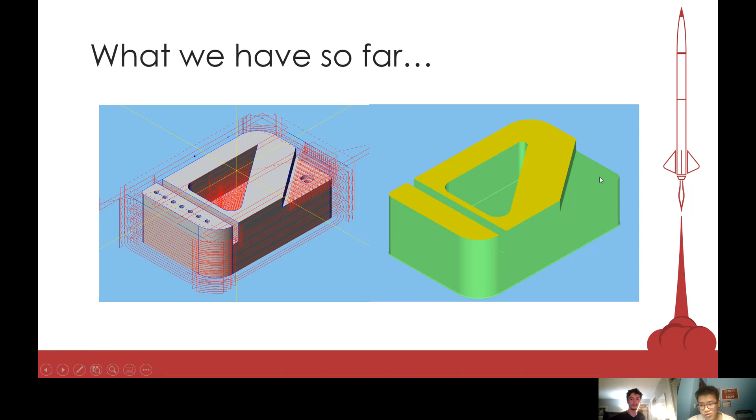Okay, so this is what we have so far. On the left side is all the tool paths, and on the right side is what the part is going to look like. But we're not finished. If you remembered, there are holes over here, and a counterbore hole over here. So we have to make those.

Whenever we're machining a counterbore hole, we have to follow this procedure: creating the bore using an end mill, and then using a chamfer drill, also known as a spot drill or center drill, to create a spot, and then using a drill to create the rest of the hole. So we'll start with that.

Let me go to here. Yeah, so this is the counterbore hole. We're going to try to machine that first. We know that the counterbore hole is 0.5625 inches in diameter, and it's 0.165 inches deep.

To make this, we're going to need an end mill that has a diameter less than 0.5625. We could use a half-inch end mill, but I think we should use a 3/8 end mill, because a half-inch end mill has a very similar diameter to 0.5625. That would mean the end mill is pretty much going almost straight down, which is not what we want. We want it to do multiple radial passes, and we can do that using a 3/8 inch end mill.

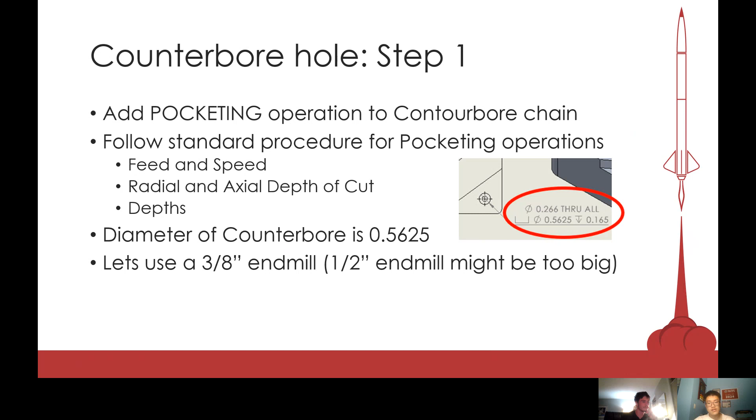Yeah, so that's why we're going to do that. We're going to add a pocketing operation to the counterbore.

If we want to add an operation to a chain, you click on the chain first. The first chain on top is called counterbore, so we're going to click on that. As you can see, the counterbore chain has now turned gray, so that's how you know you've selected the right chain.

Then we're going to go to Solid Mill Traditional - Solid Mill Production on the toolbar and click on that. The second option is pocketing. It shows facing, pocketing, contouring - this third one's contouring - then something called rest machining, which I'm not too sure what that is, and then drilling, which is what we're going to use for our holes.

But first we have to create our bore using the pocketing operation, so click on that, and you'll get the options on the left side. In our general tab, we're just going to quickly change our tool and select a 3/8 inch end mill.

Okay, then we're going to go to strategy. We're going to leave it at concentric out. And then our total depth, incremental depth, and starting depth have already been automatically generated based off the geometry of the chain, so that's fine.

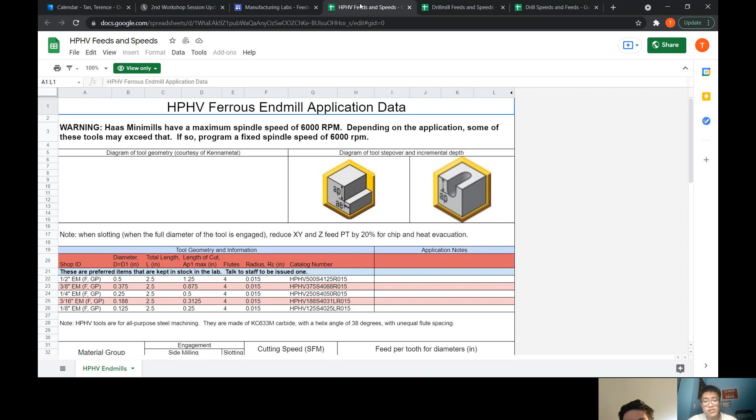Now we have to figure out what our X and Y feed rate are, and we can do that by going into Machining Data Handbook, clicking on non-ferrous end mills - that would be this one. Oh no, this is a ferrous end mill.

Okay, so we're using a 3/8 end mill. We'll set our XY feed right here at 0.003, and our Z feed at 0.0006 inches per tooth, which is labeled PT. So that's 0.003 for XY, and for the Z feed it's 0.0006 - that's going to be our X, Y, and Z feed rate.

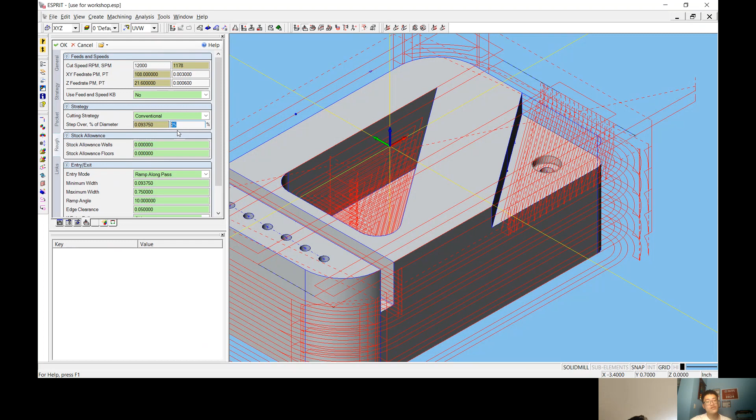And then like before, we're going to change our step over diameter to be 25%. Step over diameter is just our radial depth of cut, and 25% is what the documentation suggests, so we're going to leave it at that. Then you can just press OK.

If you zoom in, you'll see that there's some swirlies, which is pretty much exactly what we want. We're not going to simulate it yet because of how long it's going to take with all the other tool paths it's going to run for. So we're just going to go through everything else, and then simulate it, just for the purpose of saving time.

Yeah, that's what we had, which is good. And next, we're going to create our spots.

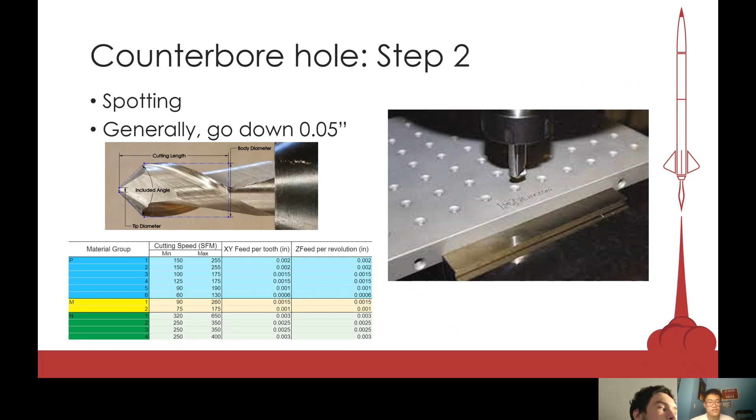To do that, we're going to click on the hole chain called 2 Hole. The chain called 2 Hole is this one, and 1 Hole is all of the other ones - all of these - because you can see that they turn gray. But we're going to stick with 2 Hole because we know that it highlights this one, which is what we want to use.

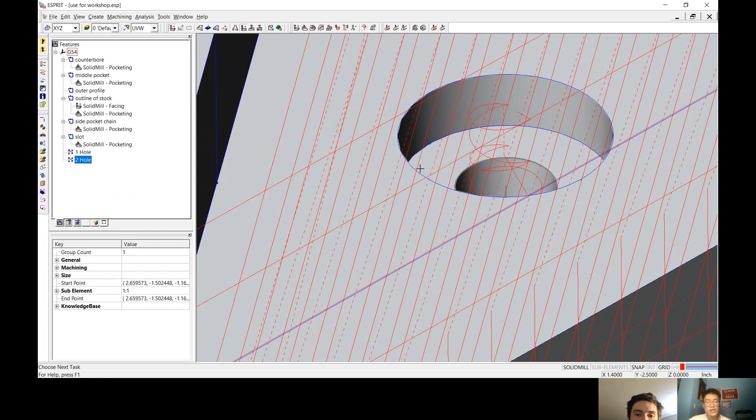Okay, so now we're going to click on drilling in the solid mill traditional - solid mill production toolbar. Go back to the general tab and then select the tool, and that's just going to be CM, short for chamfer mill, and it says 0.375 drill mill.

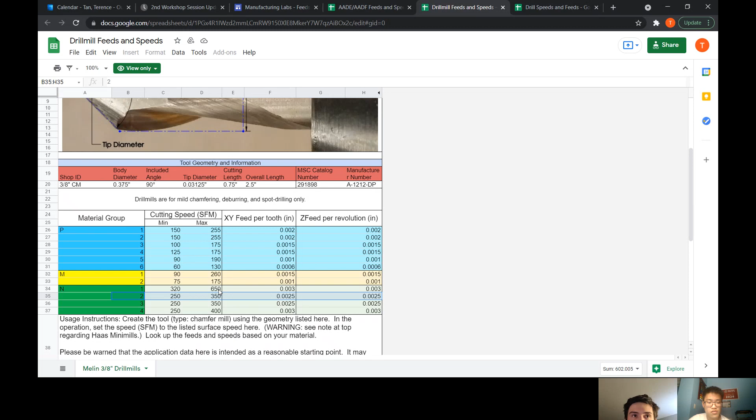Then we've got to figure out our feeds and speeds, and that's also going to be on MFE Labs. If you click on drill mill, right here, you'll get to this page, and that's what a drill mill looks like. We'll be assuming we're machining aluminum 6061 T6, so that would be an N2 material group, so we're just going to be looking at this row right here. Our cutting speed is fine - we can just use the max, so we'll set it to 350 surface feet per minute.

And then our Z feed rate is going to be 0.0025 according to the website.

And then we're going to go to drilling. There's something called cycle type, which isn't too important for spotting because it's automatically going to be set to drill. But we can have pecking operations, which I'm going to talk about later, and then tapping. So you want to make sure you use the right cycle type because that will obviously affect how it's going to machine it. For now, we're going to leave it as drill.

Our total depth is just going to be how deep we want our spot to be. General rule of thumb, you can just leave it as 0.05 inches - that's usually more than enough to lead in a drill. So we're going to set that to be 0.05, and that's our total depth. Then you can press OK.

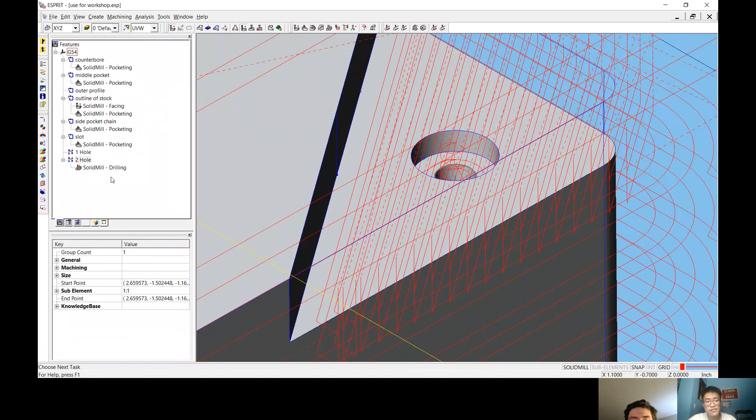Yeah, and that is - so we have first our pocketing operations here at our counterbore, then we can have this spotting operation.

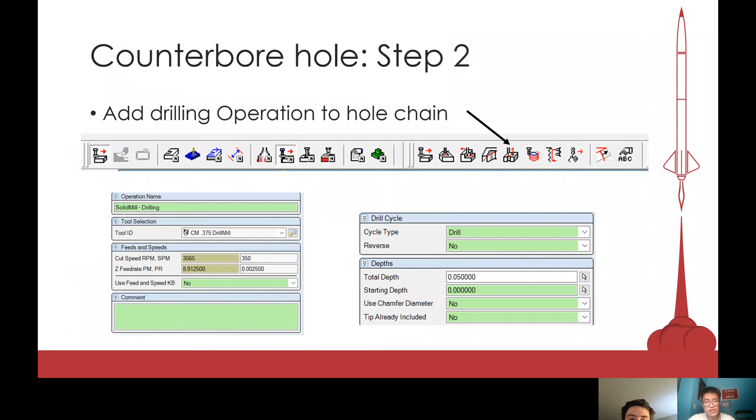Lastly, we're going to create our hole now. Let's see, we did that. Okay, yes. So we're going to use the same chain called 2 hole, and then we're going to click on drilling again. But instead of using a chamfer mill, we're going to use our H drill, because if you remember from our second session, we figured out that this hole has the diameter of an H drill.

An H drill has a diameter of 0.266, which is pretty close to a quarter-inch drill. So we're going to be using the same feeds and speeds for a quarter-inch drill for simplicity, and usually that's perfectly okay.

Then if you want to find your feeds and speeds, that would be right here under drill bits, and you're going to see this - our N2 class, highlighted right here, aluminum cast, less than 10% silicon. Our uncoated option, which is typically what we would be using, is 225 surface feet per minute. So we're going to set that right here - speed 225.

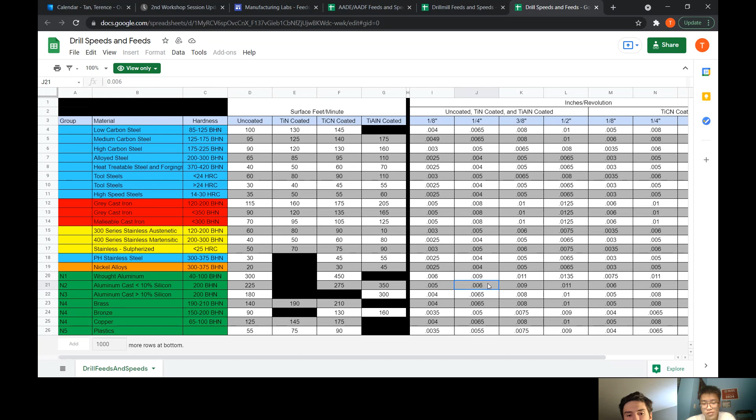Go more to the right, this has all of our feeds. So we're going to be using it uncoated like before. Our drill, H drill has a very similar diameter, a quarter inch. So we're going to be using those feeds. Quarter inch, and then we're going to go down to N2, and that's going to be 0.006. We set that as our feeds and speeds for H drill.

Okay, then we go to drill. When making a hole, you either want to use drill or peck. What drill does is it takes the drill and goes straight down in one pass, all the way down, and doesn't stop. What pecking does is multiple attempts of cutting into the metal. It goes down, goes back up, then cuts a little bit more, and comes back up. So it just incrementally cuts more and more.

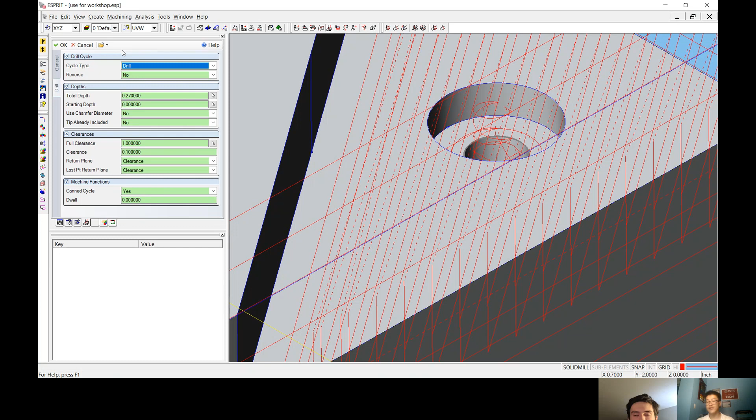When you have holes that are deeper, you're going to want to use peck because it helps with chip evacuation and minimizes the load that you apply on the end mill, especially because this hole is a through hole. It's quite deep, so you're going to want to use a pecking operation.

These peck increments will adjust how deep the drill will go for every peck. Generally you want to keep that equal to the diameter of the drill, and it automatically does that for you. So we're going to leave it like that.

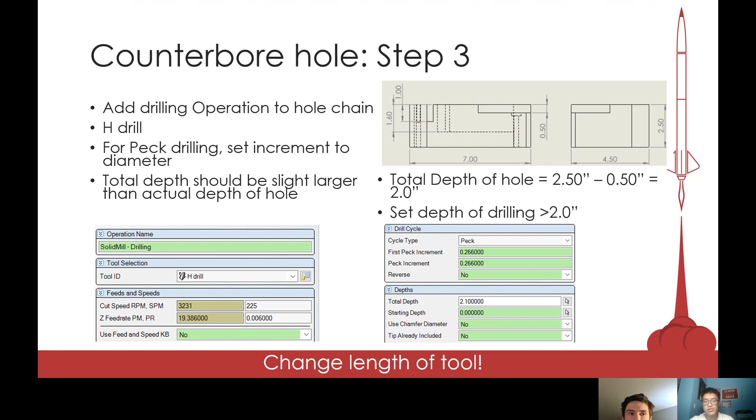Our total depth, we're going to have to figure out because this is wrong. If you look at this drawing, the entire part is 2.5 inches long, and this side pocket is half an inch deep. Then the depth of the hole is going to be 2 inches. We're actually not going to set our drilling depth to be 2 because of that chamfer that the drill has. So we want to go a little bit deeper to make sure we go all the way down. So we can do like 2.1 inches, and that should be okay.

Press OK. So yeah, you see here, that's how deep it's going to go, which is good. We want it to go past it.

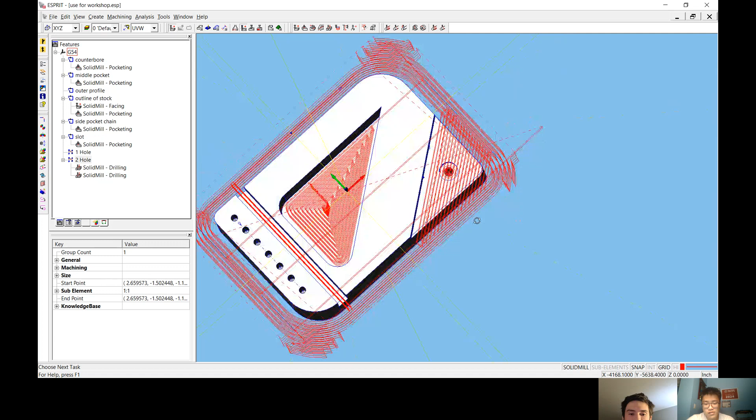So now we can simulate it. If you want to simulate, you want to click on the simulation button on the toolbar, which is the green one. Then you'll have your play, pause, and so on. Before we start simulating, I want to go ahead and click on simulation parameters and make sure your collision detection is on full.

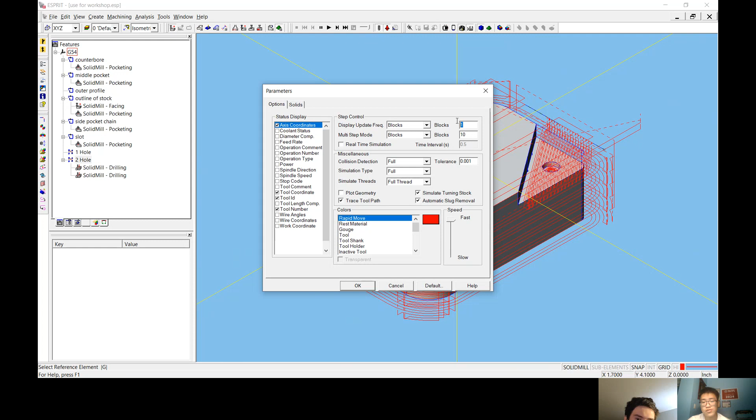Then we could speed up our simulations. You can increase these numbers. Let's add like a 0 here. Let's see how fast that goes. And you just press play.

I think that's faster than before. And here it comes. See? That's good, it went all the way through. Perfect.

Keelan, is this what you have so far?

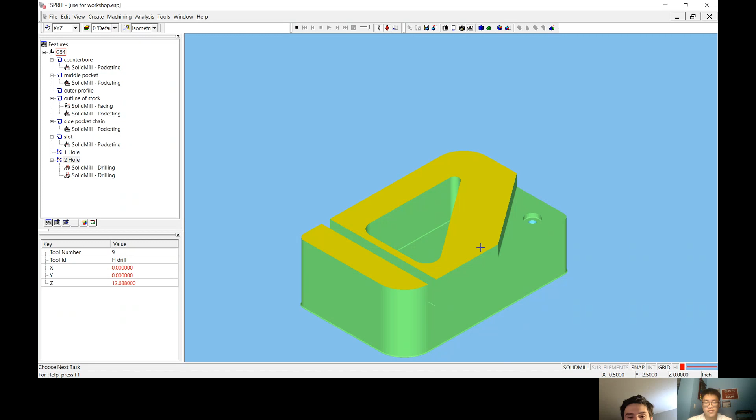My computer crashed twice when loading ESPRIT because I spoke too soon, so I'm just on my phone watching. Okay, cool, I'll just keep going. Hopefully you'll get a chance to try it on your own whenever you're free.

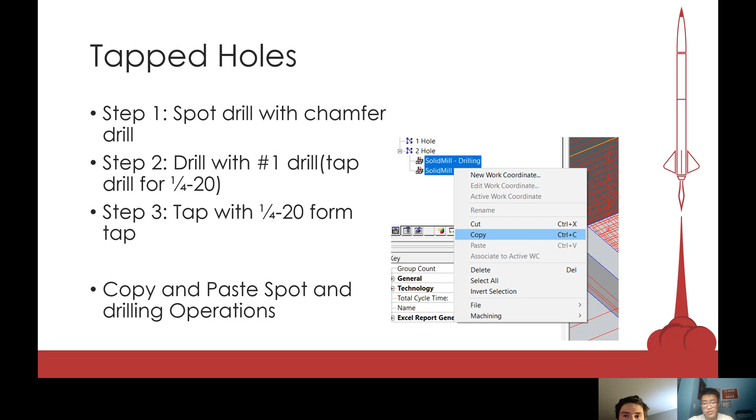Okay, so we're like halfway there. Now we're going to go to tapped holes, which is just a little bit more involved. So something that you can do in ESPRIT is copy milling operations and then apply those operations onto a different chain.

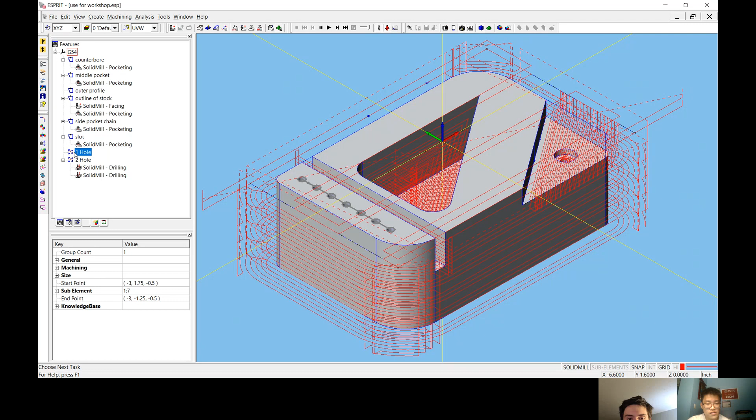So we can just click on both. If you hold Control and click on both, it'll select both, and then you can right click and press copy. Then you click on one hole, this is the other chain that has all of these holes, and you can right click that one and press paste.

So now what that has done is it added a spotting plus a drilling operation. Our spotting we can leave. Our drilling, however, we want to change to adjust to the correct tool we want to use.

So we're going to switch H drill to number 1 drill. Remember, this is a quarter 20 tap, and the tap drill for a quarter 20 is a number 1 drill, so we're going to use that. Then we're just going to leave the feeds and speeds, it's whatever.

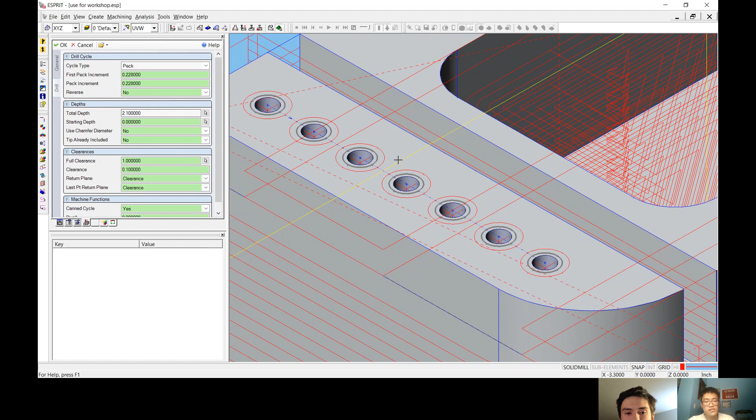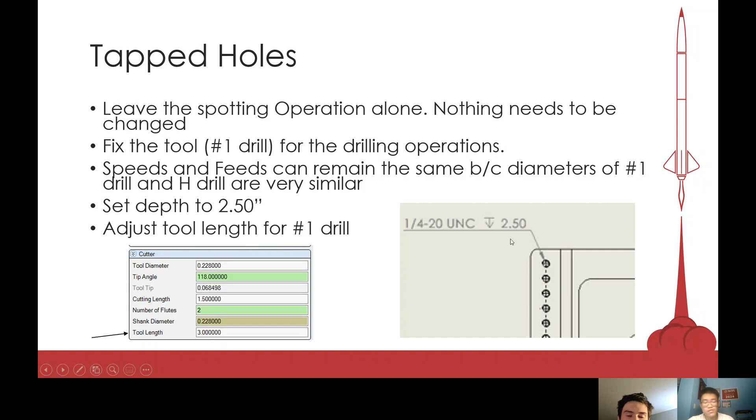Then we want to change our total depth, because these holes are not through holes, they're just different depths. So we want to look at the drawings and see how deep they are. This drawing says they're 2.5 inches deep, so we can set this to 2.5.

It's okay. So yeah, now we have spotting and drilling done just by copy and pasting. Very quick and fast.

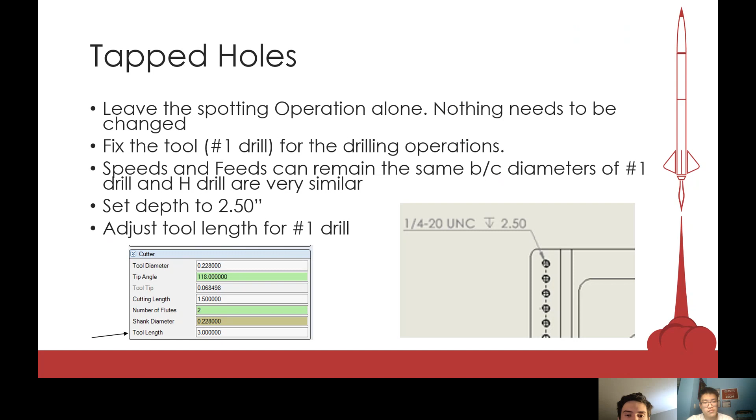And the last thing we want to do is tap our holes. Okay, here. So we're gonna click on one hole, which is our chain. Then we're gonna go to Milling, Solid Mill Traditional, and press Drilling. So oddly enough, tapping is also within the drilling one, so we just click on that. Go to General, click on quarter 20 tap.

Then speeds and feeds for taps are just quite difficult to find. So I've just been using this chart I've gotten from the Washburn stuff, and we're gonna be using a quarter inch, and it's gonna be this aluminum cast alloy, so it's gonna be 60 surface feet per minute.

I'm gonna change this to 60, and then hopefully you'll remember our Z feed rate is equal to... our pitch, actually.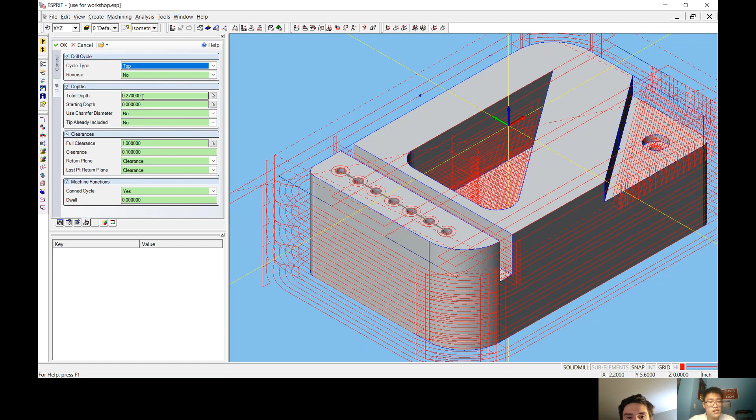Then we go to drilling. Instead of drill cycle type, we're gonna switch it to tap, and our total depth is gonna be 0.27, just like before. Then we're gonna press OK.

I remember there was... it's okay. Now we're just gonna run it. Let me see if I can make this even faster. It takes a long time. Oh, there we go, it's fast.

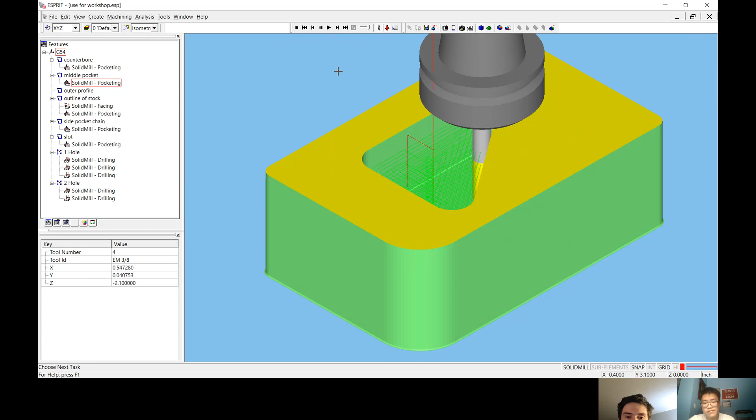I don't know why I did that. Maybe it's too fast? That shouldn't matter. What? Okay, whatever, we're just gonna keep going.

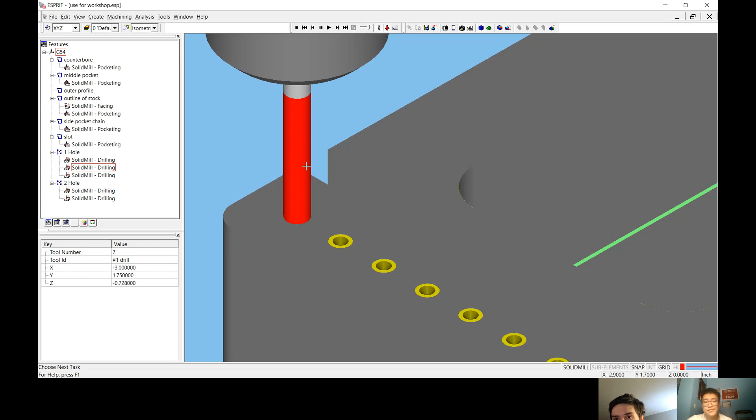Okay, so yeah, it's just gonna tell you there's a simulation error, but it's not a big deal. It's just because the drill size is cutting into the insides of the threads, which is nothing you can do. So in this case, you can just press the skip button and spam it.

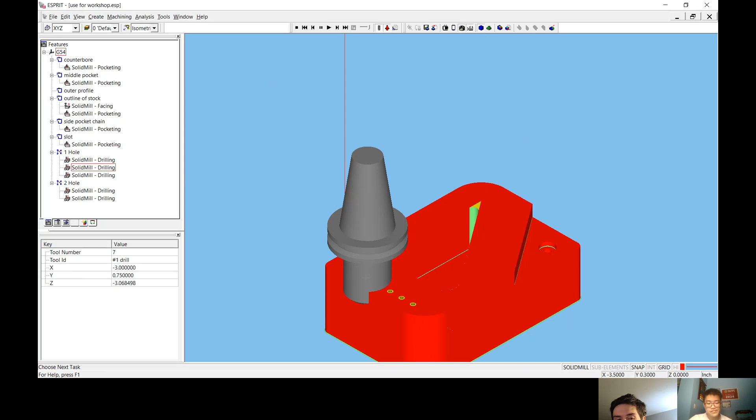Well, the only issue is that the drill is too short, so look right here, the tool holder is going into it, but we can change that. And it's gonna keep spamming it through. There's a lot of holes, so you can click it a lot of times.

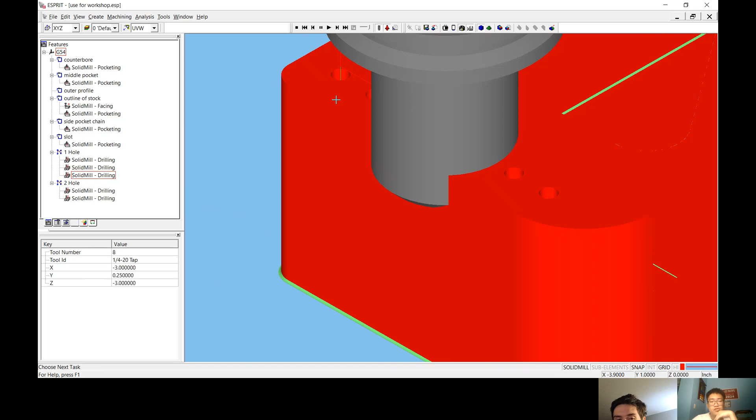And now it's tapping, and it has an issue again because it's hitting with the tool holder and cutting through the inside of the threads, but not a big deal.

We can just go ahead and change it. So we either use the number 1 drill, we're gonna change the tool length to be like 3 inches, and we're gonna do the same thing for our 1/4 20 tap.

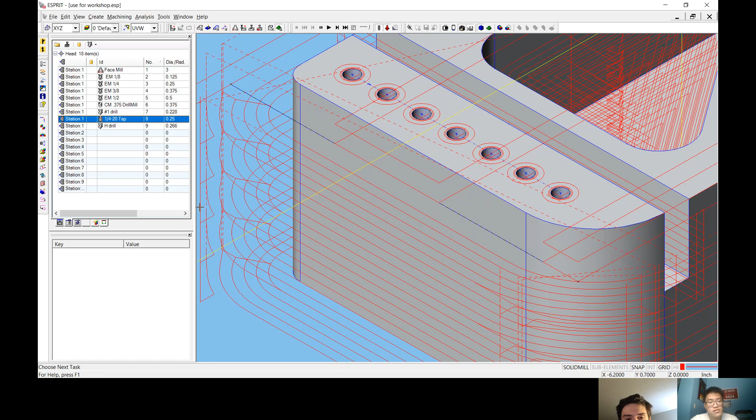I don't know why it's doing that, I feel like it's just not knowing what the problem is. But yeah, it's gonna keep telling you there's an error, but there's no error, it's just not very smart.

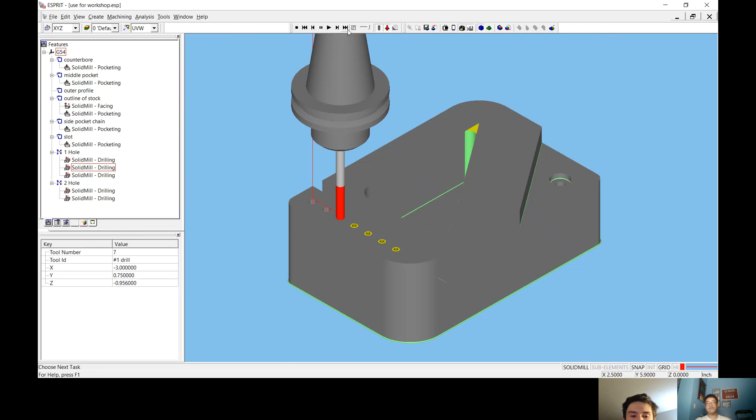But yeah, that is how you do drilling in CAM.

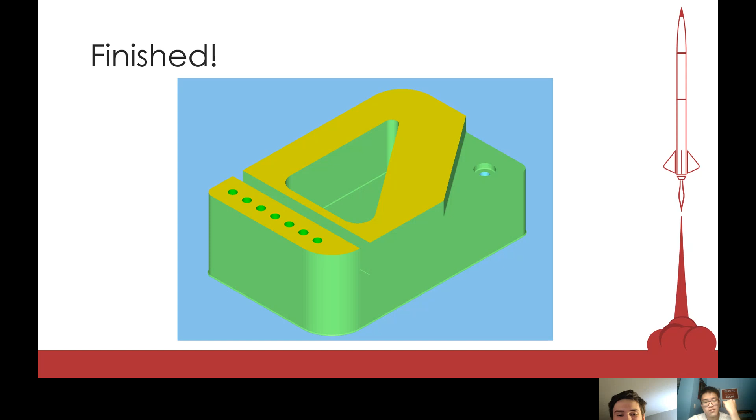Don't mind the blinking red, it's fine. Should have an epilepsy warning at the beginning of this.

Do you have any other questions? Not really. Okay, I don't—I think it's the VPN's fault that might be causing it. That is probably why. I've had a lot of issues with connection problems, things not loading because of having the VPN on. It's not very great. Yeah, I would just try it again tomorrow or some other time. Well, okay, if you don't have any more questions, I'm gonna stop the recording. Alright, cool.